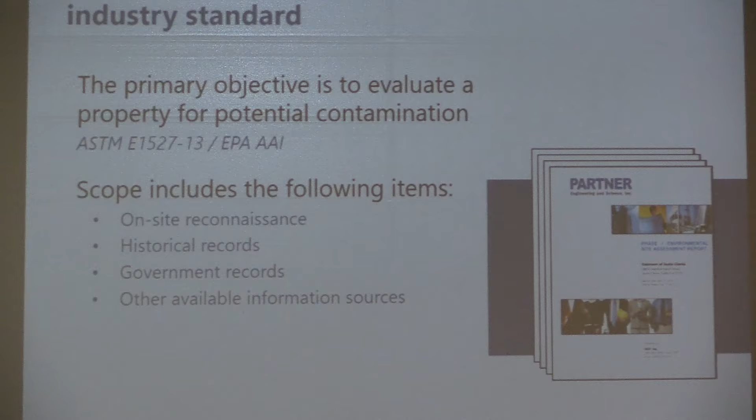We're also doing a historical record search. I'm going to give a case study in a little bit, but it's not always what is there now, but what was there previously. A lot of times something's been redeveloped and it's new and fancy and looks great, but that doesn't mean there's no environmental risk associated with it.

We're also looking at government records, where we're looking at the records for the on-site property, but then also the surrounding property. And then there's other sources as well. We're calling fire departments, looking at prior reports, and conducting interviews with neighbors, owners, and occupants, that sort of thing.

So whenever you get the phase 1 report, I want to just go quickly over what does it say and what does that mean. I really think that 80% of our clients probably only read this executive summary and don't look at anything past it.

So you might get a report and it might be anywhere from 500 to 2,000 pages. I think people really look at 2 or 3 pages of that. And so really the key term to know is recognized environmental condition.

That's absolutely what you don't want to see. That means that we think there is contamination, or we know that there's contamination associated with the property, and it's typically going to require something further.

Next is a controlled recognized environmental condition, and that's contamination that's in place that has received regulatory closure, but there's some sort of activity and use limitation or engineering control requirement in place. In a lot of cases, that may not matter.

If somebody tells you, well, you can't drink the groundwater at a property, most owners aren't going to care because nobody's really drinking groundwater now — it's hooked up to municipal. But what we're seeing a lot right now is, kind of on redevelopment and infill development, maybe there's a restriction that says no multifamily development's allowed or no multifamily use. Well, somebody could be looking to tear down a former gas station and build multifamily, and so that might have a significant impact on how that real estate can be utilized.

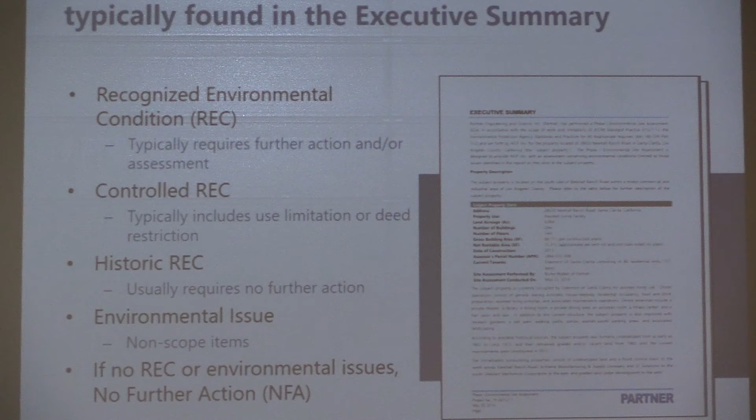So what's driving people to order phase 1s? We really see various stakeholders being driven for different reports. Definitely pre-acquisition, predisposition — like I said, sometimes we're seeing more of that where sellers want to get in front of it and make sure that they don't have an issue. Or if they know they've had issues over time, maybe they're looking to just go through and succinctly discuss those, organize it so that it can help potential buyers understand that.

Oftentimes we're seeing people make this available maybe during best and final, or once the second round of bidding happens, so that people can get their heads around it and they're not getting caught on the back end with something falling out of contract.

We're also seeing this before somebody goes into a lease, and when somebody exits. Some of your larger corporations and national tenants want to know: is there contamination before I come in? Let's document if it's there before we come in, and maybe you address it, or maybe it's just to say, hey, we didn't cause this, this was here before we moved in. Then also we're seeing it post-lease: we knew there was no contamination when we came in, and we want to make sure that when we leave, we have that documented as well, because we have deep pockets and somebody might come back later and say we caused this. So that's something your national tenant might be looking for.

So here's an example of a site where, when you visit this property, this is an adaptive reuse project in the Midwest. It was historically a manufacturing facility, and around 2010 or so, it was converted to medical office. It's very high-end medical office - think exposed brick, exposed beams in a lot of cases. It's a very attractive property when you walk it.

As we were going through the environmental analysis and phase one assessment of this, we found that everything in the yellow had known contamination, and the state had closed that out, with some land use restrictions in place, but everything was buttoned up and taken care of. What we found on the western side of the property, not in yellow but inside the red line, is that there was a historical transformer manufacturing or repair shop that had not been looked into. The concern we raised is that transformer shops historically are associated with a lot of PCB use, PCB contamination that hadn't been looked into.

So that was something we raised with our client, and I'm not actually sure if they ended up going through with the acquisition or how they worked it out, but it's something that caught the seller off guard, because the seller actually had some prior reports that had overlooked this historical use of the property. It really caught everybody by surprise, but our client who was acquiring it needed to figure it out. So this is an example of where, just because you're looking at it now and don't see any issues, doesn't mean there's not anything to worry about.

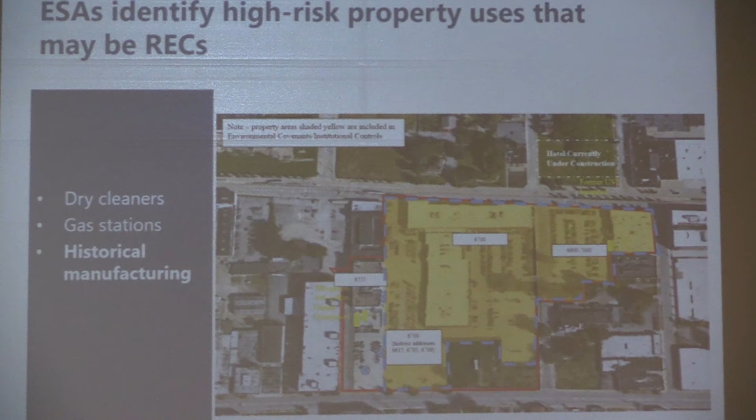I can tell you that right now we're working on somebody who's looking to redevelop a building in the state of New York, and there's an underground storage tank, a heating oil tank that was closed in place. Nobody ever sampled it, and we just sampled around it this week and found that there's free product. Our client's looking to come in, take this building, probably a 12-story building, and completely rebuild it as a senior living facility.

So what we're going to get into is that there is in fact contamination. They're going to have to do assessment, get closure from the state, and do likely some sort of mitigation for vapor associated with this. It's part of their overall acquisition and redevelopment of the project. It's something we can help quantify for them, but they're going to have to figure out with the seller, from a dollar standpoint, how much this is going to cost and how they come to terms to make this deal work now that there's, call it $250,000 they weren't expecting when they came into this.

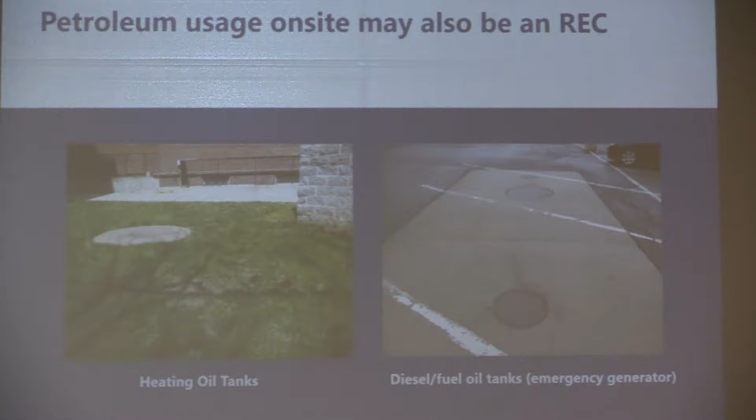One of the things that's interesting about this, there's probably about 8,000 gallons of diesel fuel in this tank, and had they had somebody remove that from the tank when they acquired the property, they probably could have done it for free because that fuel had value. Now it's been there for 4 years and it's gone bad, so now they're going to have to pay somebody, I don't know the exact cost, but call it $2 a gallon to come take it out and dispose of it. So now they've probably cost themselves $15,000 by delaying and letting this fuel sit there and go bad.

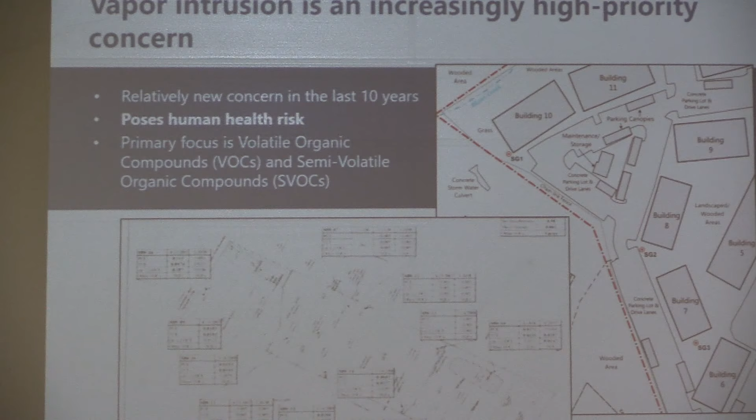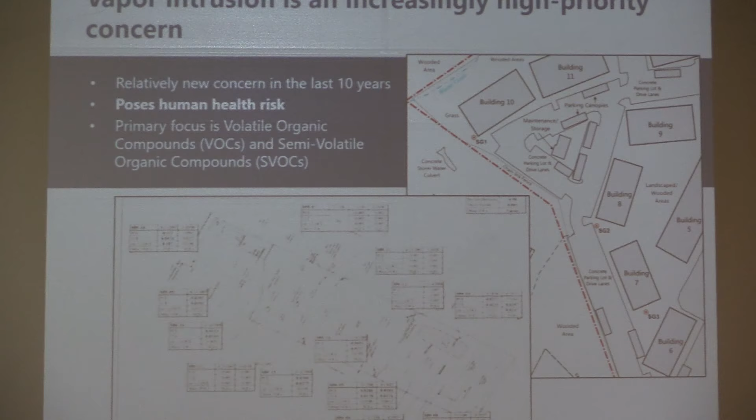So when it comes to environmental risk, one of the biggest things, and I'd say this is going to be the biggest thing across the industry that we're seeing right now, is vapor intrusion. This is a high priority concern. It's relatively new, probably over the last 10 years the environmental industry has gotten into vapor, and whether it's the state of Georgia, North Carolina, whoever, the EPA, this is really kind of the biggest risk right now. And why is that?

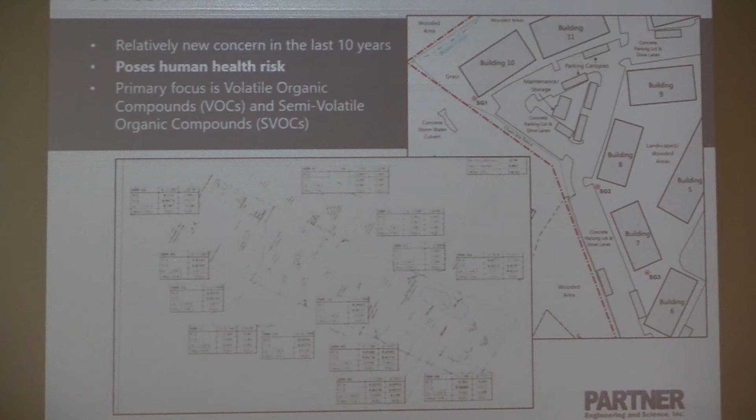Well, I mentioned before, if you have contaminated groundwater, nobody really wants that, but you're not drinking it. The vapor is potentially being inhaled by the occupants of the property, so it's something that can pose a human health risk. I've got an example here of where we had to do a vapor evaluation off-site coming underneath a multifamily complex. The owner of the multifamily complex wasn't going to be liable for cleaning up the contaminated groundwater, however they are responsible for ensuring that the occupants of their property aren't being impacted. So that involved a vapor evaluation.

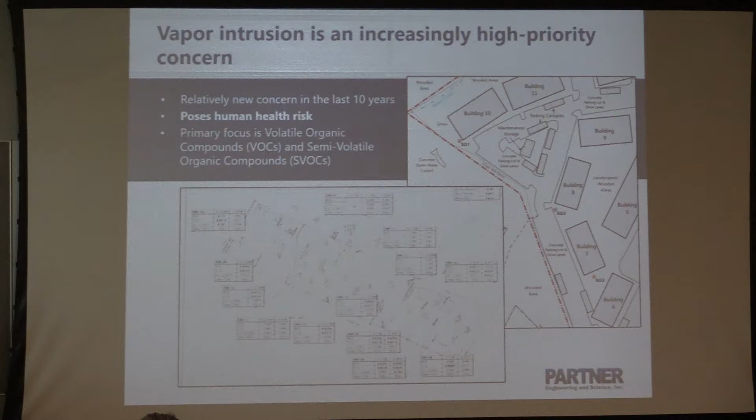Another case study, from a project probably in 2016 or 2017 that we worked on. Somebody was buying another adaptive reuse project. The property was redeveloped in the early 2000s into pretty high-end office space from historical manufacturing. It actually has a brownfield agreement in place in the state of North Carolina, so it had regulatory closure. However, when this project went through the brownfield program in the late 90s, vapor wasn't evaluated. So we looked at it and said, hey, we know it has closure, but vapor hasn't been evaluated, and we think it might pose a risk to the occupants of the property.

So we did some sampling out there and found that it is in fact a concern. On this one, they were going to have to install vapor mitigation throughout 3 buildings. I know they ended up getting, this was a $42 or $43 million acquisition, they ended up getting a $1 million purchase price reduction to deal with this issue. Now they're in the process of having to deal with it as they're going through and even changing the property more. As they're doing additional tenant build-outs, they are having to install the vapor mitigation.

Last I talked to the client, they were expecting to spend maybe $600,000 or $700,000 on that mitigation. So they're coming out slightly ahead, but we'll see how they end up. Vapor can end up being a major factor, even on something that's closed, if it received regulatory closure a long time ago.

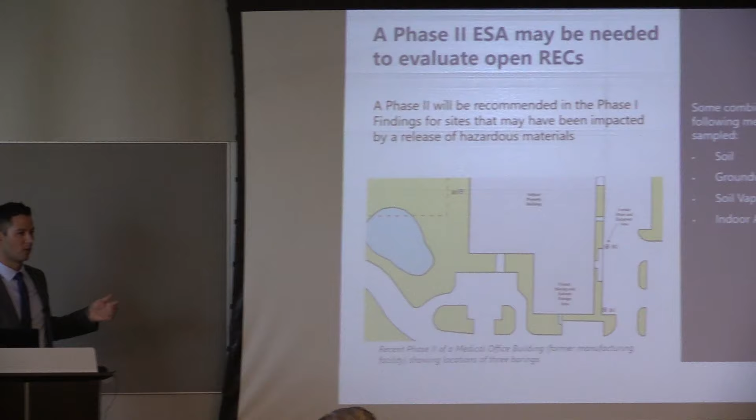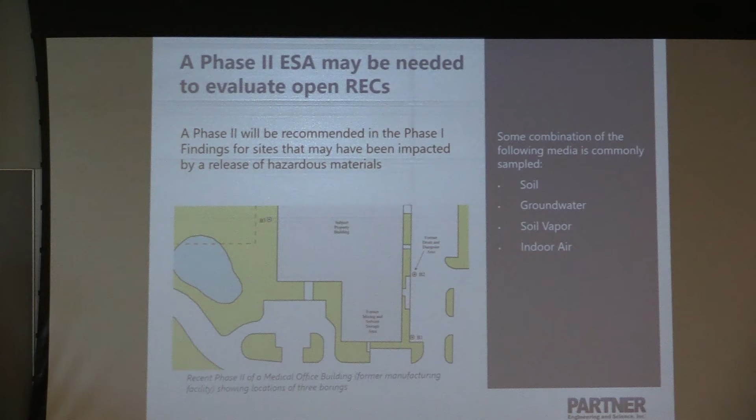So I just touched on this a little bit, but if a phase 1 identifies potential contamination, how do you know if there's actual contamination? Well, that's where the phase 2 comes in. A phase 1 is typically saying, hey, we think there's contamination. A phase 2 is going out and collecting actual soil, groundwater, and vapor samples to say, no, we know there is contamination.

And in some cases, you do the phase 2 and you say, you know what, there's actually not contamination. I think sometimes people look at that and say, oh, we just wasted $8,000. I tend to not look at it that way. It's better we didn't find contamination, and when you go to sell or finance this property, you have actual proof to show that there is no contamination. So even if a phase 2 comes back clean, I think that's really what a lot of people want, and there's a lot of value in that.

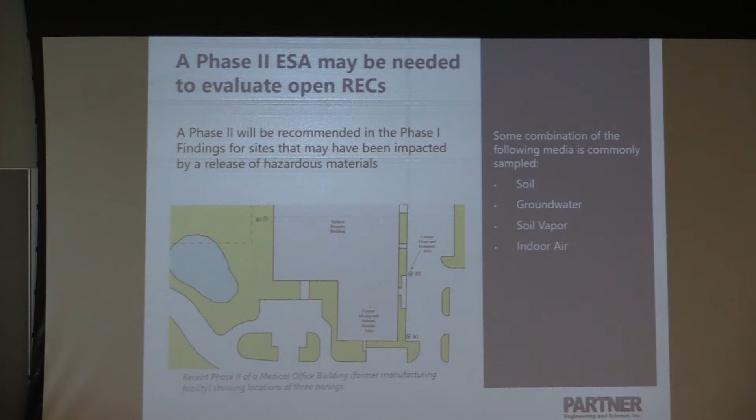We have a picture up here. This is another medical office property where it was historical manufacturing, and we ended up doing the phase 2. The buyer of this property fell out of contract and didn't end up acquiring it. So the owner came back to us and said, hey, this came up during due diligence, and any other potential purchaser is going to have the same concern, so why don't we have you do the phase 2 now so we can address it? It actually ended up turning up clean, so now the next person that comes along will be able to show this historical use is not a concern.

All right, so the last slide to finish up on contamination and environmental due diligence is, what if the phase 2 finds contamination? What do you do? Oftentimes you have to do further sampling to characterize it. You want to figure out, well, we know there is contamination, how much contamination is there? Oftentimes there can be regulatory involvement with that, and then you want to quantify it.

Sometimes if you need that really quick, we can put together what's called a remedial cost estimate, similar to that $1 million vapor mitigation project I mentioned. One of the things we tried to help our client with is, they said, okay, we have this contamination, what does it mean? By putting together some numbers, we were looking at it being probably up to $1 million worth. Of course, the seller had their consultant looking at it as well, and they weren't just taking the buyer's word for it, but they ended up agreeing on that.

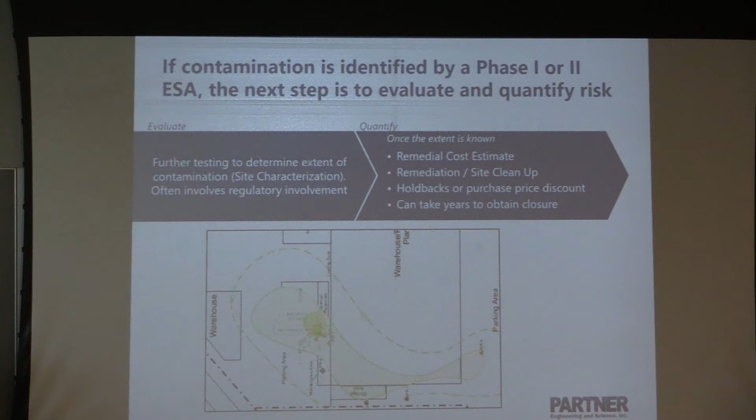It can also get into actual remediation and site cleanups. So you bought the property with contamination, now you have to deal with it, and that's something the owner is dealing with. They probably hand it over to an asset manager who says, figure this out, or keep this moving so we get regulatory closure. And then often we see some sort of holdback or purchase price reduction when there is known contamination, as a way to deal with it and keep deals on track.

So next I'm going to talk a little bit about industrial hygiene. This is still in that environmental realm, but we're no longer worried about soil and groundwater contamination. You guys are probably going to be familiar with some of these. The two I'm going to focus on the most right now are asbestos-containing materials and mold.

What's driving these? Asbestos is in building materials. It's a known carcinogen, and if asbestos is in place and in good condition, it's really not a concern. But if you're looking to redevelop, renovate, or demolish a building that has asbestos in it, there are federal regulations that require abatement of that material to prevent it being released into the atmosphere.

Another project we're actively working on right now: we have a client looking to buy a 20-story tower in the Midwest. It's currently multifamily and pretty run down. They're going to gut the building and turn it into a much nicer student living facility. Because of this planned renovation, we did a fairly extensive asbestos survey as part of their acquisition due diligence, and we found out there's quite a bit of asbestos in the building.

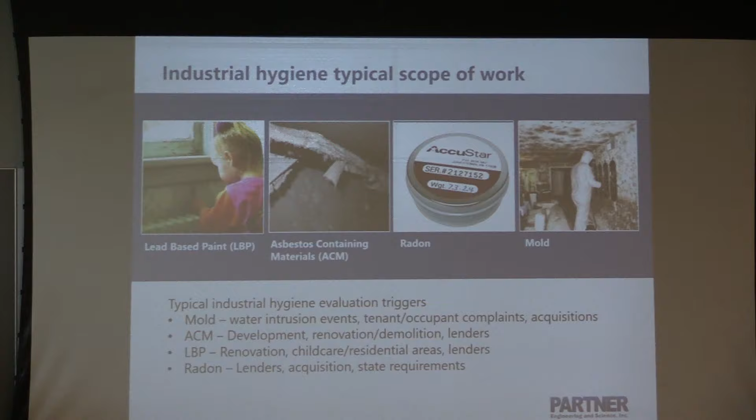I think that's generally an extreme, that's not the normal thing we see. Oftentimes, even if it's just bringing a new tenant into a space and you've got to take out floor tile, that's a more typical sort of abatement we'd see. That's where, even on the leasing or property management side, it would be needed. The asbestos surveys are often being driven by the building departments—they say, hey, you want this renovation or demolition permit, where's your asbestos survey? So that's something to think about if there's any renovation or demolition planned.

The next one is mold. There's not a whole lot of state or federal regulation. There are a handful of states with regulations—Georgia doesn't have them, South Carolina doesn't, North Carolina doesn't have them. But there are some federal guidelines for that. So what's driving mold concerns? It's often going to be exposure to occupants.

In a scenario you wouldn't expect, we were working with a self-storage owner with a property here in Metro Atlanta. They had a small roof leak, and somebody had a little bit of moisture buildup in their unit, leading to a little mold on a couch they were storing there. They called the health department, who came out, and it turned into a much larger issue than maybe it needed to for what was maybe less than a square foot of mold. But in that case, it was a tenant who was driving this.

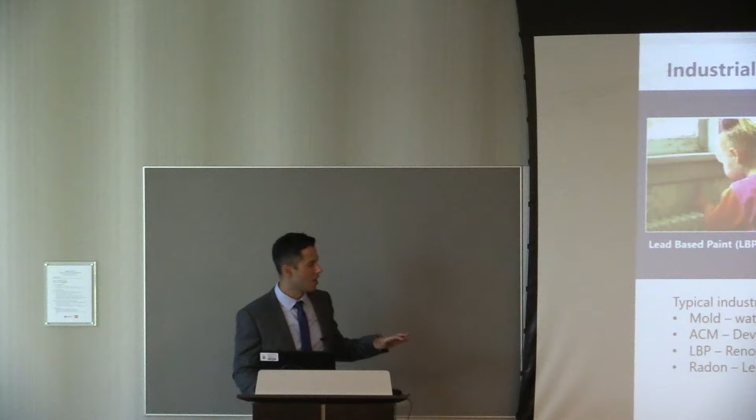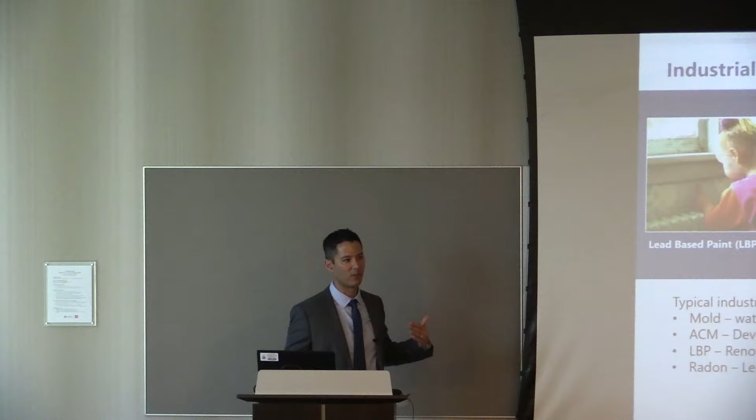If you're in a commercial office space and someone tells you, hey, I feel sick because I think there's mold—we were also recently working on an acquisition of several office buildings in Jacksonville, Florida, and at the 11th hour, as due diligence was nearing the end, a tenant lodged this complaint against the property management. So we ended up having to do a full mold survey, and it turned out we didn't identify any evidence of mold, but it's something that came up at the 11th hour. I think oftentimes, if you're a building owner, you want to make sure you're not exposing occupants to mold, but that's often driven by health concerns rather than regulatory ones.

The next one is, if you're not dealing with multifamily, you probably don't care too much about this, but radon is a concern for multifamily properties, based on how much time people spend there compared to, say, an office or industrial commercial use. We've got a map here showing the areas known as high radon areas—you'll see the Midwest and Northeast are where most high radon is expected to be found. I'll say the Metro Atlanta area is also a high radon zone, so we fairly often find radon throughout Metro Atlanta. The driver for assessment of this is often going to be lenders.

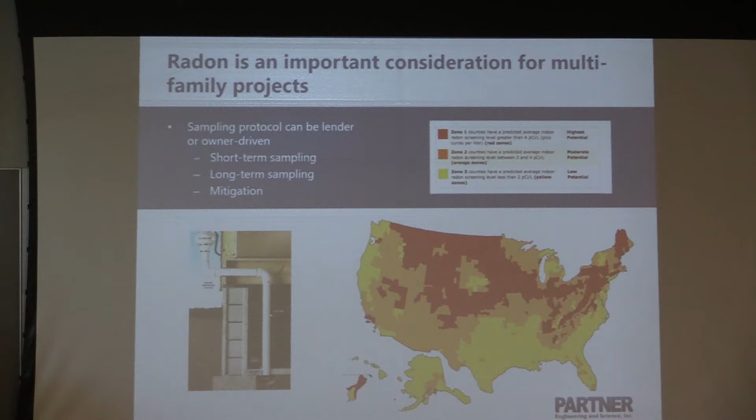A lot of lenders, especially in the multifamily space—Fannie Mae, Freddie Mac, HUD, and a lot of life insurance companies—are expecting some sort of radon evaluation as part of financing. So that's the largest driver on the financing side of things for radon. But it is something to be aware of. It's usually not a deal killer—radon mitigation is not a very expensive endeavor, so it's something we very rarely see actually derail a deal. But it is something to consider and be aware of.

Next I'm going to talk about what is engineering due diligence. We've spent a lot of time talking about environmental due diligence, where I said think about the ground and below. For engineering due diligence, it's actually quite the opposite. I like to think of this as what can you actually see, so the ground and up. It's the physical structure on site, what condition is it in, and what do you as an owner, tenant, whoever, however you're interacting with real estate, need to know about the physical structure on a property.

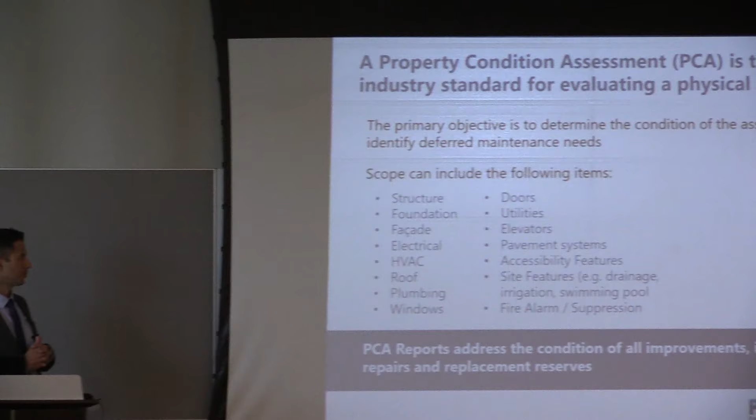So how do we evaluate this? Typically the industry standard is going to be a property condition assessment. The objective of this is to identify what the asset is, what type of construction it is, what condition it's in, and are there any deferred maintenance costs associated with it? So are there any deficiencies? When you look at the items covered, it's virtually every aspect of the building, from the foundation to the roof, to the electrical, to the plumbing, to the interior finishes, that sort of thing. So it's all components of it.

We're looking at elevators. The type of asset you're looking at might dictate what's most important, right? If you're looking at a 500,000 square foot industrial facility, that roof is going to be really important because you have 500,000 square feet of roof. It's probably going to be the most expensive building component associated with it. If you're looking at a tower like we're in now, maybe the elevators and the mechanical systems are going to be a little bit more important. So what's most important is really going to be driven somewhat by that asset class and your involvement. We've seen some recently too, where if it's a triple net lease with a 20-year lease, and you're buying it, maybe you don't have as many concerns about the condition of the building because you know you have some credit-worthy tenant who's going to be in there for the next 20 years.

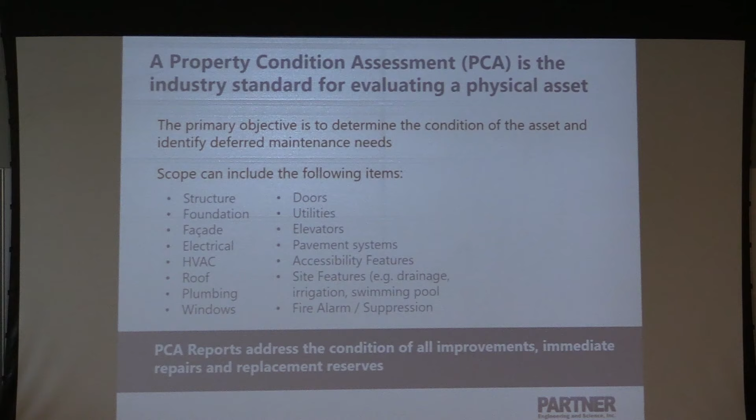So as we do this, how do we evaluate it? Well, one of the things we're doing is putting together a list of deferred maintenance items. So we found these deficiencies. Again, you say, great, what does that mean to me? Well, we typically try to assign an opinion of cost or dollar value to correct that issue. So, okay, we found these 10 items that are wrong. In this example, maybe it's $267,000 to correct all the things we found. And this is where, it's not a quote, I will tell you that. We're not giving you a bid to do the work, but we try to help give you an order of magnitude of what it's going to cost to correct an issue.

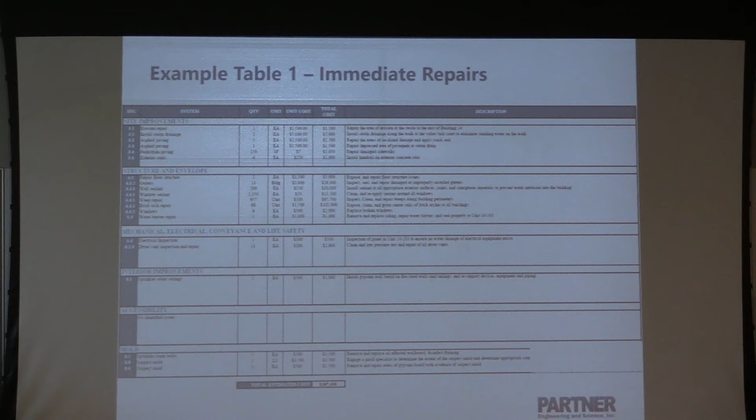The next item we also look at that's a pretty critical component is the replacement reserve schedule. So, we've told you what deficiencies you have with the building now. You can address those, however, maybe you negotiate with the seller, maybe it's for your own informational purposes, maybe a lender's doing a holdback for it depending on why the report is being ordered. But the next component is, well, what about going forward? So what we really try to do on this capital reserve schedule is help evaluate your major expenses, typically over a 12-year period, although we can fine-tune that based on how you're using the report. The 12 years is typically assuming 10-year permanent financing, and lenders typically want to see an extra 2 years at the end. So, okay, we expect that you're going to need to replace the roof in 5 years so you can start your capital planning for that, or your HVAC, your major cost.

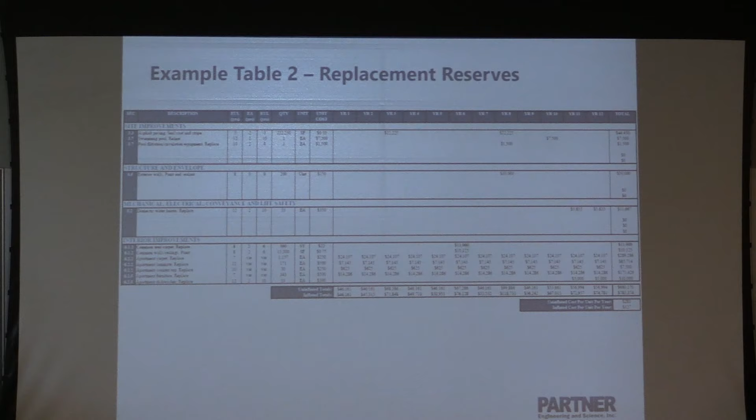So I'm going to talk a little bit about the stakeholders for PCAs, and this differs a bit from phase ones because there's a lot more nuance to property condition assessments. The drivers for these reports are going to be very similar, but we have a big distinction here that's not on the environmental side, and it's usually whether it's an equity report or a finance report. A finance report is typically intended only for use by a lender. When you're looking at that, we're not going to be as conservative for a lender as we are for an actual owner or somebody looking to, I don't even want to say buy a property because we see it with potential tenants as well. But if you have some other stake other than lending, you probably want a more conservative approach to that report. So as an example, if you're buying a property, you probably want to know everything that could be wrong with it up front.

Worst case, how much is this going to cost so that I can set aside money for it, or so that I can have this discussion with the seller. If you're a tenant and you're going to be responsible for the HVAC within that space, well, what condition is it in? Am I going to have to replace it in 2 years? If I am, maybe that's a negotiation point with a landlord before I enter into that lease agreement.

That's kind of what we see: your acquisition level equity report is typically going to cost more money, but it's going to be a more thorough report, and it's going to have more of a worst case scenario, whereas a finance report's a little bit optimistic since a lender isn't in the first loss position - that would be the owner of the property.

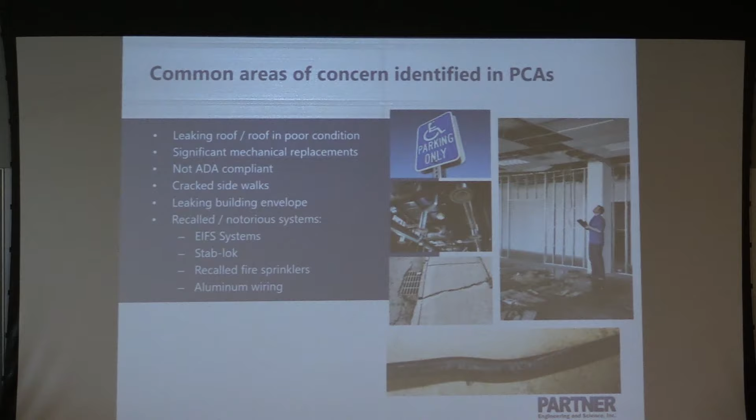Another one that's on here, and this will again depend based on asset class some, is accessibility, so ADA. If a property was built before ADA was put into place, chances are it doesn't comply, but there is no real grandfathering for ADA, and you might have to make upgrades to the property as part of future renovations, or even right away, depending on what those items are. It kind of gets into dealing with attorneys and that sort of thing with how you implement accessibility upgrades to a property.

So next I've got a case study. This is another project we just recently worked on - a medical office building in the state of Colorado. This is not a very big building; we're talking, I want to say this was a 30,000, maybe 33,000 square foot, two-story medical office building.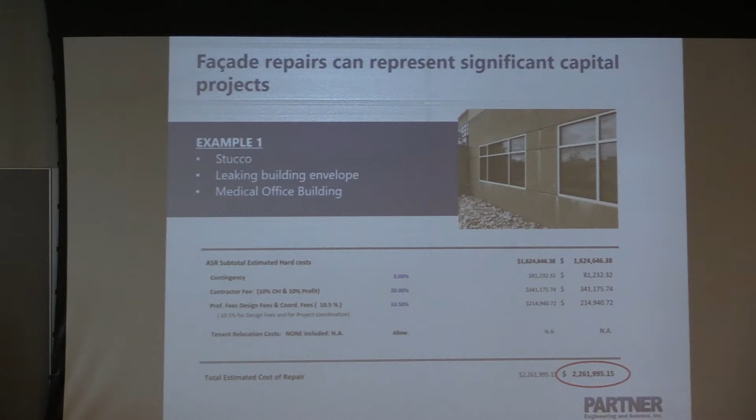So next, talking a little bit about capital reserves and capital planning. This is that table 2 that we showed where we're trying to project what expenses and costs we expect are going to be associated with the building over the next, say 10 to 12 years.

There can be a lot of different approaches to this. Are we going to replace the mechanical systems, or are we going to overhaul them? Maybe you can extend the life by another 5 or 10 years by spending $50,000 now instead of $200,000, and that might make more sense based on whatever hold period you're looking at. If it's a long-term hold, maybe you replace it. If you've got a 5-year hold, maybe you overhaul it.

With roofs, it's really important to understand, maybe you can put a coating on that roof to extend the life of it. If there's only one kind of roofing system in place, you can probably overlay it and just put a new single ply membrane on top at a much lower cost. If there are already 2 roofing systems in place, code doesn't allow you to overlay it, so you're looking at a tear off and replacement where you have to put in new insulation and everything else. So the cost can vary dramatically as you get into the details and the approach you want to take.

The use of a building matters too. If you're in a tower like we're in now, elevators are going to be a really important component, making sure tenants aren't sitting there for 10 minutes waiting on the elevator every morning and afternoon. That's probably not going to be great for tenants. Whereas if it's a 2-story office building, if the elevator's slow, you're probably not going to have that big of an impact, tenants probably aren't going to be making a huge decision based on that. So when it comes to modernizing, you might look at those differently based on the type of property and type of tenants in place.

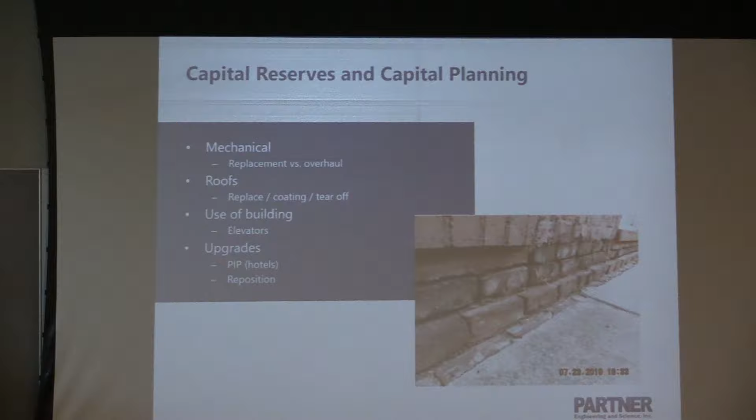Of course, the person looking to buy this building is like, yeah, that's great if we're going to have this as a museum or something, but that's probably not what we're going to do, we're not going to be able to make money if we do that. So we've been talking through different approaches with them. If you take that first $3.6 million approach, maybe you don't have to spend any money on the facade for the next 20 years. I think what we're actually going to do here is adjust it, we've kind of said, hey, this is the Cadillac option, maybe it doesn't make sense here. So you're just going to scrape the paint in some areas where it's loose, do some limited tuck pointing, and repaint over everything that's out there.

I think they're planning to spend $400,000 or $500,000, and that's the approach we're going to take with the report, because that's what makes sense. And they know that, hey, 5, 6, 8 years from now, they're probably going to have to spend another $500,000. So really, talking with the client and owner about what they want to do and how they plan to manage the property is pretty important, because there can be quite a bit of variation in approaches for what you do.

So next, I'm going to talk a little bit about forensic investigations. This is kind of the phase 2, if you will, of a PCA, where you start doing a deeper look. You'll see up here we have a couple different things.

You have a roof on the far right, where you're looking at it, you can see patching in the roof. When we look at it with the infrared camera, you can actually see where there is moisture in the system, and there has been some wet insulation and that sort of thing.

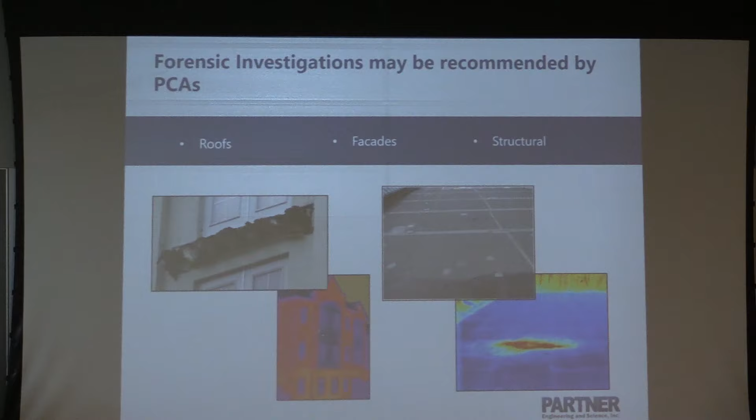So really we have the ability to do these things. Typically the biggest areas we're looking at are roofs, facades, structural - this could apply to mechanical and that sort of thing as well. I think sometimes with these you can start getting into some pretty big liability issues. In this case, his biggest concern was that code enforcement might pull all of his COs for the entire apartments, and then he was going to have to relocate all of those tenants.

So next, go over this quickly - energy audits. This is something we're seeing more and more. If you're in multifamily, you've probably been seeing this being driven by Fannie and Freddie. But certainly if an owner is paying the utility bills, it makes sense to do an energy audit. Figuring out where you can go through and get your highest return on investment, if it's replacing lighting to LEDs, that sort of thing. So an energy audit can help an owner identify how they can save money.

We help figure out what it's going to cost, how much it's going to save you, what's your return on investment - we're looking at all those things. And then you can also implement it in accordance with a capital program as well. Well, we're planning this CapEx, maybe we implement some of these measures as part of that. So really it's something we can see as being very useful on the asset management side of things to lower those operating expenses.

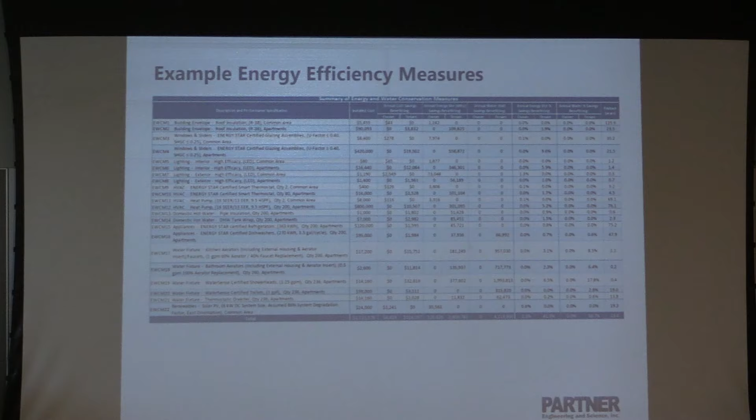So, what are some of the other due diligence reports? I'll go over these quickly because we're getting close to the end of time.

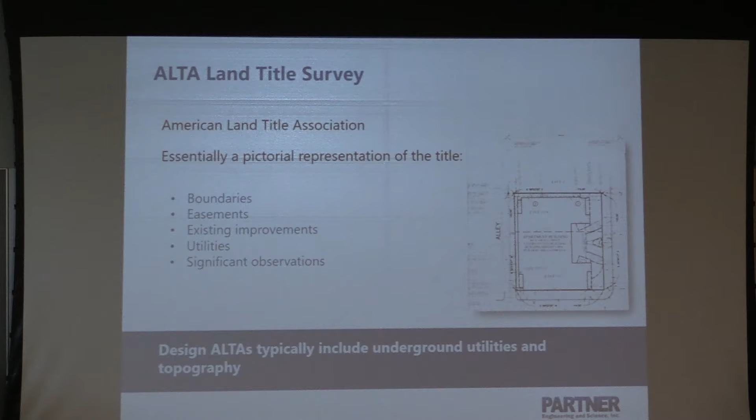An ALTA survey is basically going to be a pictorial representation of the title. It's going to show, if you think you've got 9 acres to develop and it's only 8.5, that could have a material effect on the density you could put on a property and how you can use it. So knowing that up front is pretty important. If you're going to be using a survey for design, you probably want to have your underground utilities marked and topography marked on there as well. That's something the civil engineer will ask for, and that's not something we would normally do unless it's specified that it's being used for design.

Zoning reports as well. This gets into whether the property is conforming use or legal non-conforming. Maybe it was conforming when it was built, but code changes over time have made it so it's not conforming now. Or occasionally we come across non-legal, non-conforming, where something needs to be done to bring that back into a conforming use.

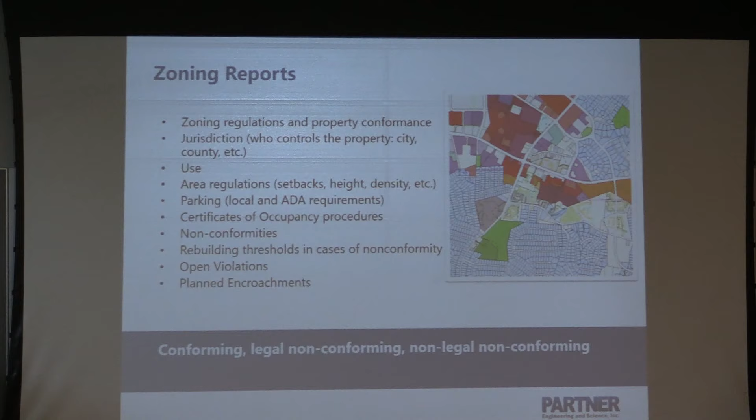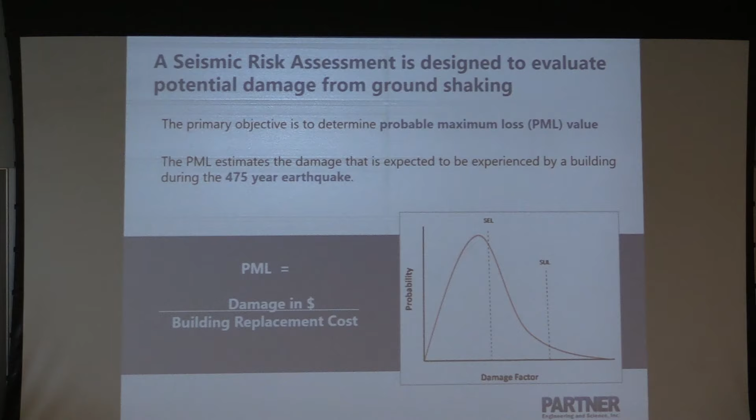I mentioned this quickly, seismic risk assessments. This is where we help assign a value and risk to seismic concerns. Are you going to need earthquake insurance? There are really only two areas in the southeast, if that's where you guys are, like the Memphis area. So if you're doing work in those areas, I'd be cognizant of what's happening from a seismic standpoint. I've never actually seen a building fail a seismic report in Charleston, but it is something lenders are starting to ask for evaluation of.

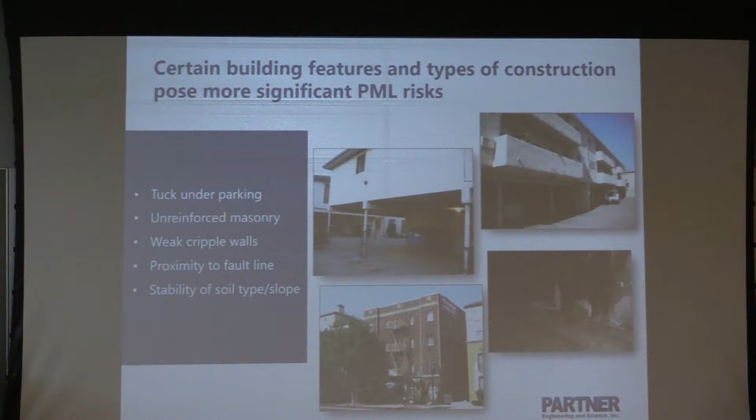There are a handful of concerns when it comes to seismic: unreinforced masonry buildings, tuck-under parking, that sort of thing. But again, it's going to be a much bigger deal if you're doing work in California, Washington State, that sort of thing.

So, key takeaways as I wrap up: environmental and engineering reports are important tools for risk management associated with commercial real estate. Additional investigation in phase 2s and forensic engineering reports can sometimes be needed to really get a full understanding of what's going on. The reports needed might vary based on how you're interacting with commercial real estate. You might never need a phase 1, but maybe you need an asbestos survey or a mold survey.

And second, the approach of the report can vary by the user. We take a slightly different approach if you're selling a property, presenting it in a more attractive light than if you're buying it, where it's going to be a little more doom and gloom. So knowing why you're ordering the report is pretty important too.

All right, so any questions?

Yes, I had a question concerning vapor intrusion. What type of manufacturing or types of buildings would have vapor intrusion?

Sure, so the question is on vapor intrusion, what are the typical contaminants of concern, or what raises that concern. The answer is volatile organic compounds. That may not mean a lot to you, but I'd say chlorinated solvents and petroleum products. So anything like a gas station or gasoline, or a dry cleaning constituent, or historical manufacturing that used chlorinated solvents, like a parts washer or degreaser. If you have pesticides or metals contamination, those aren't going to be a concern, nor are your heavier oils and fuels typically, but it's things that volatilize easily and get into the atmosphere.